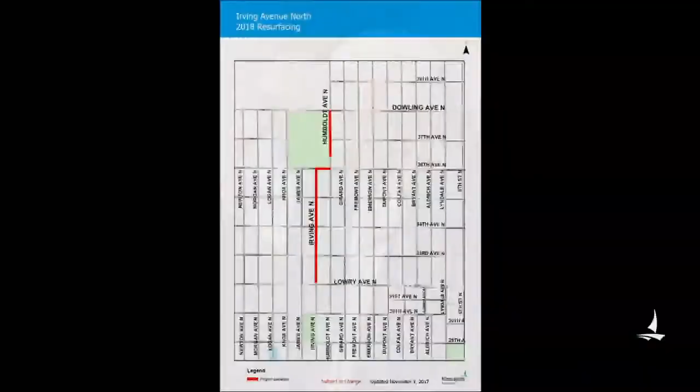The project itself is bounded on Irving Avenue North from Lowry to Dowling North, with many of the street sections built in 1978. The PCI rating for these project streets varies from 43, 44, and 50. Cost for the engineer's estimate is $8.3 million in 2018, and the approximate length of the project is 0.81 miles, a little short of a mile.

The project scope is a 2-inch mill and overlay with approximately 130 feet of existing curb replacement, with some CenterPoint Energy utility work. Public Works designated this project on February 9th of 2018, and we had a community outreach meeting on Monday, March 21st, with 135 invitations mailed and 2 attendees in attendance for that meeting.

Are there any questions per the presentation? Seeing none, I will open the public hearing. People can come forward and give testimony. Has anyone signed in? No one signed in. Does anyone wish to come forward on item 1? Seeing none, I'll close the public hearing and move the item as submitted.

Any further discussion? Seeing none, all in favor say aye. Aye. Dissenting nay. That carries. We can now go to item 2, which I believe will be with Mr. Matsumoto as well.

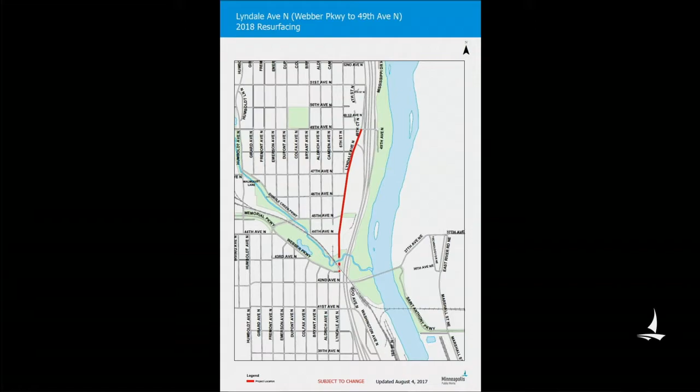Public Works is recommending the passage of a resolution ordering the work to proceed and adopting special assessments in the amount of $497,903.49, and the passage of a resolution requesting the Board of Estimation and Taxation to authorize the city's issuance and sale of assessment bonds in the amount of $497,905 for Lyndale Avenue North Street resurfacing project.

The project length is 0.81 miles, a little short of a mile, and the project scope is a 2-inch mill and overlay with approximately 600 feet of existing curb replacement. CenterPoint Energy does have some minor service work and work on a couple of valves. Other planned work for this project is 2 new 5-foot bike lanes and pedestrian safety improvements at the intersection of 45th and North Lyndale.

The project was designated on February 9th of 2018, and Public Works hosted a community meeting on Monday, March 19th, with 52 invitations mailed, no attendees in attendance. The project is scheduled for summer construction.

Thank you for the presentation. Any questions per that presentation from the committee? Seeing none, I will open the public hearing. I do have someone who signed in. I'll start with that person. Others may come up and sign in as well.

Starting with Mr. Bob Mayer, please come forward, state your name and address for the record. Hi, my name is Bob Mayer. I live at 4810 Fremont Avenue North and work at 4835 Lyndale Avenue North, which is right on this project. I have a question. My boss has a number of properties along Lyndale, and it seems that the assessment varies widely among those properties by frontage or square footage, and I'm wondering if perhaps the staff could speak to how that assessment is calculated. I would note that a business partner of my boss has a bar on 46th and Lyndale, and his assessment is roughly 1/4 by square footage or frontage compared to my boss's assessment. So maybe somebody could speak to that.

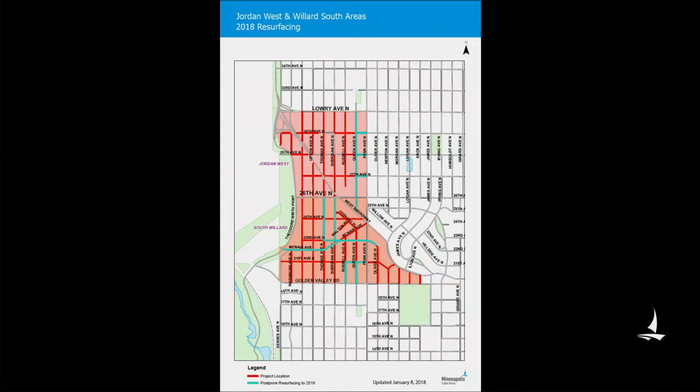The Willard and Jordan areas shown on the screen were built in 1977 for Willard and 1979 for Jordan, with PCIs of 54 and 62 respectively. The total accumulated miles for Willard is 5.66 miles and Jordan 4.61 miles for the combined assessments for both projects. The project scope is a 2-inch mill and overlay with approximately 2,000 feet of existing curb and gutter replacement.

Portions of this project will be delayed until 2019 to accommodate CenterPoint Energy and C-Line detour routes. The utility work in the area includes CenterPoint Energy replacing a number of their gas mains and services, upgrading the Beltline project, and other planned work, as part of the detour for the C-Line bus rapid transit.

The project was designated on February 9th, and on Monday, March 20th, 989 invitations were mailed with 18 attendees at the meeting at North Commons. This project is also recommended for continuance to the May 1st committee meeting so that residents along the blue streets shown, which are scheduled for 2019, can be noticed in a public hearing held on that date.

Thank you for the report. Any questions on the report? Seeing none, I will open the public hearing.

I am Richard Peel, and I live at 2365 Farrant Place. I'm sorry I missed that public meeting—there are so many pages in this thing that I didn't see it on the last page. But I look around my streets, and I drove down here today, and the only street I saw in better shape than our streets was the brand new Washington Avenue out here. Our streets are in very good shape. There's some cracks, but we just got done with a very harsh winter.

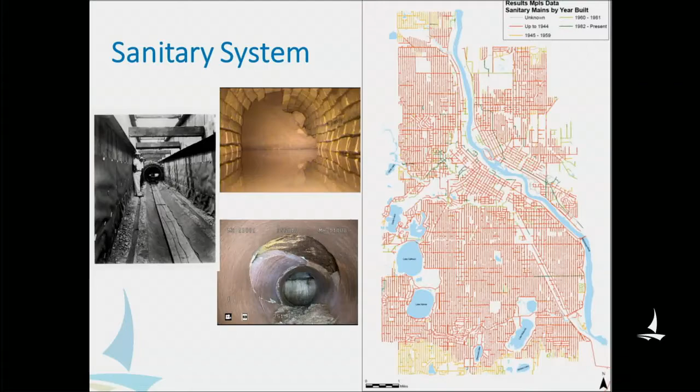As you may know, the sewers were originally built as combined sewers. This is not unique to Minneapolis. It's similar to cities that are commensurately old and around the same size as our city, meaning there was one set of pipes that collected both the sewage and the rainwater and went straight to the river. This was how it was between the first sewers of the late 1800s and the first storm sewers, which weren't built until development started around the lakes in the 1920s.

Around this time, not surprisingly, people began to worry about the health of the river. In 1926, the National Park Service did a fish survey between St. Paul and Hastings and found 2 fish — not 2 species of fish, but just 2 fish. At that time, the city of Minneapolis and the city of St. Paul came together and decided it was time to build a wastewater treatment plant. That was the Pig's Eye plant, which today is called the Metro Wastewater Treatment Plant in St. Paul.

When that came online in 1938, all of the sewers, which were still combined, went to the wastewater treatment plant, which worked fine unless it was raining. Then the sewers were over capacity and overflowed untreated to the Mississippi River. This was the case through the 60s when we started to build separate storm sewers comprehensively as part of a citywide paving program and accelerated the separation of both storm and sanitary. In the early 80s, the federal government began to pay more attention to this around the country.

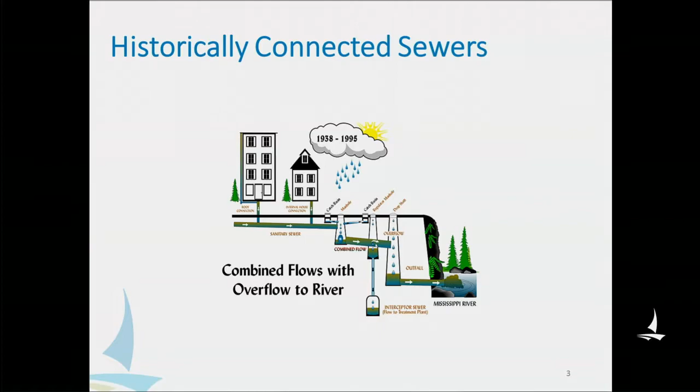With the help of the federal government, the city, in a data-driven way, started to work on separating the storm sewers from the sanitary sewers. Since then, we have focused on looking at ways that we can get direct connections of storm out of the sanitary sewers. And because of that intentional investment that Director Hutchinson noted, we have essentially separated the sewers.

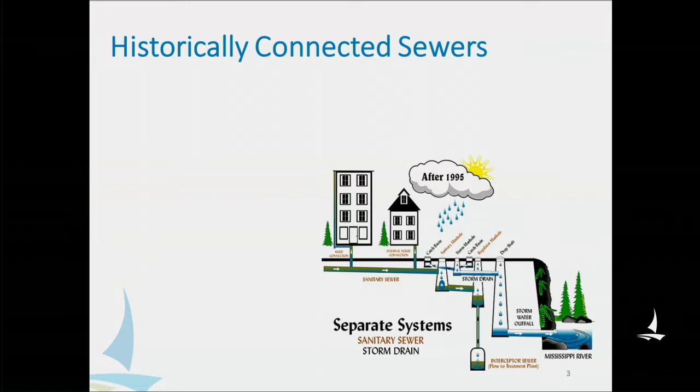So this is a success story, and I think it's worth noting that Minneapolis and St. Paul are the only cities that I'm aware of in the entire country that have been able to do this without a consent decree from the EPA. Most other cities, Midwest and on both coasts, are still under the thumb of the EPA, who are telling them year by year how much they need to invest and what they need to do. The city has been able to do this proactively without that.

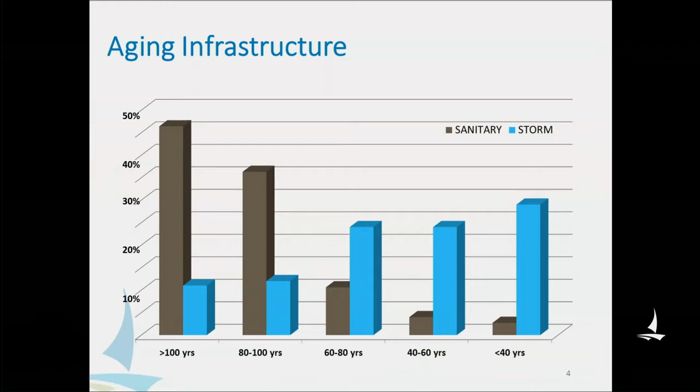The storm system is also majority more than 50 years old. It's the age of the infrastructure, our need to protect human health and the environment, and our desire to be good stewards of public dollars that have driven us to take a data-driven assessment approach. We're looking at condition, using modeling tools, and working with our regulatory partners to make sure we have the tools to move ahead in the best way.

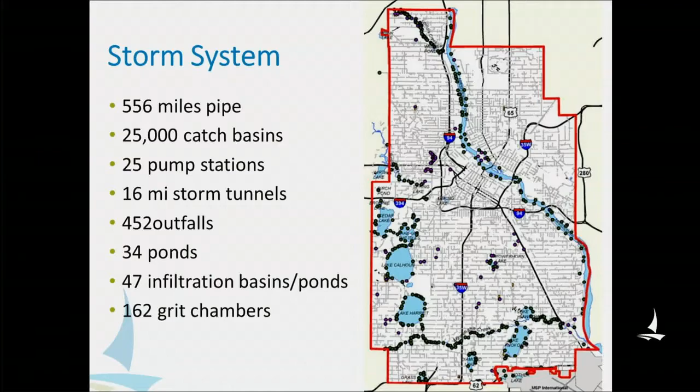One of the critical components of our storm system are our storm tunnels. We have 16 miles of deep storm tunnels underlying the most densely developed part of the city. Together with MnDOT tunnels, they drain almost a third of the city, shaded in green here.

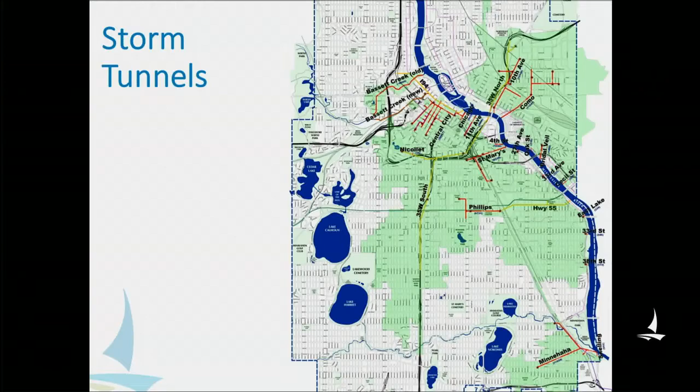The tunnels, like the rest of our sewer infrastructure, are very old and were built at a time with less impervious surface, so they were designed to accept runoff from a different landscape. As a result, we have a pressurized system such that when it rains, not only are the tunnels full, but the manholes 100 feet up are full of water, putting pressure on those tunnels.

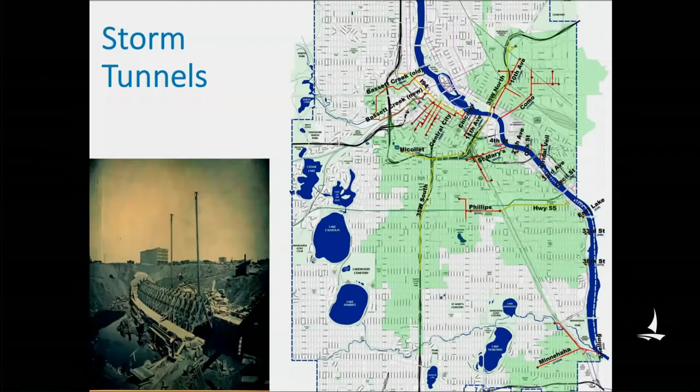This picture shows the original construction of the Bassett Creek Tunnel, the old Bassett Creek Tunnel, which is today underneath the North Loop. You can see the construction techniques were different than we would do today, and the landscape looked very different than it does today.

Much of our work on the tunnel system today is not only understanding condition, but looking at integrity, trying to find ways to decrease pressurization, fill voids, and reinforce the liner.

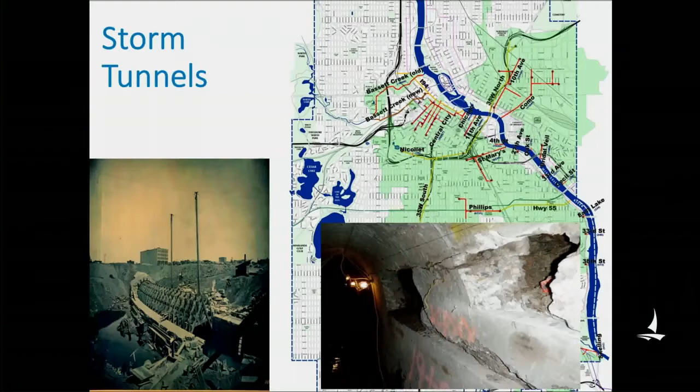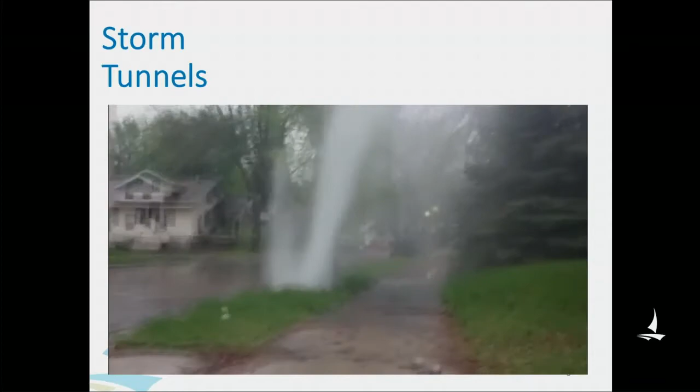This video is taken near the Como Avenue Tunnel near the University of Minnesota. We've since fixed this location by putting in a surge chamber, but it highlights the fact that it represents not only underground risks, but above ground risks as well.

So we've talked a little bit about aging infrastructure and the tools we're using - data-driven, televising data - to look at risks and prioritize where we'll look for capital and operation and maintenance investments.

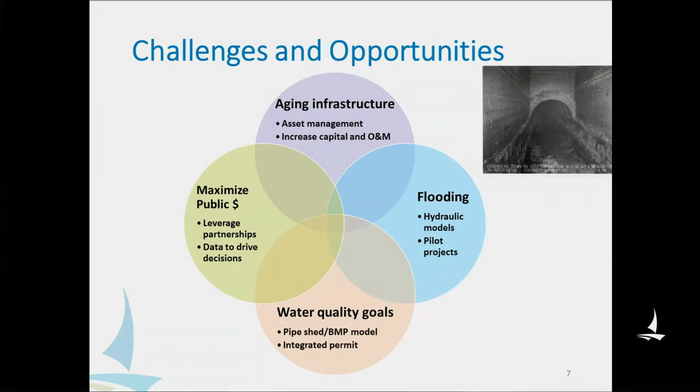On the storm side, we're also looking at flooding, and many of you know this because you receive the same types of emails I do every time it rains. Historically, the city was more responsive to flooding complaints, but we've since moved away from that and are doing a comprehensive stormwater model of the city, which will be complete shortly. We're using that model to help prioritize where we should mitigate flooding.

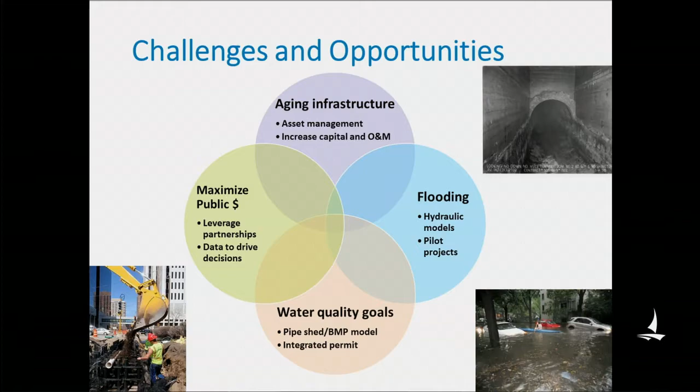I'll talk about several pilot projects we have underway. As part of that, we're looking at where we need to do more for water quality - where we need to fix infrastructure, address flooding, and put in water quality treatment to protect our lakes, creeks, and river.

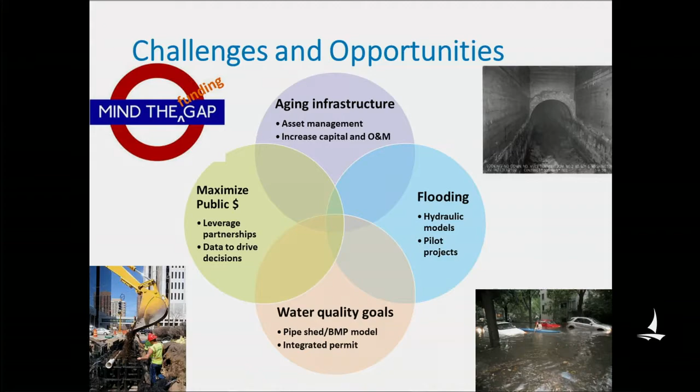And finally, how we can maximize opportunities with our partners - not only our internal partners when street reconstruction comes up, but our external partners like our watershed partners, the county, and the Met Council.

The National Pollutant Discharge Elimination System is the permitting program that we and other cities operate under to regulate both wastewater and stormwater. Historically, the city had two permits. We had a combined sewer overflow permit, or CSO permit, with the Met Council, originally issued in 1984 and reissued in 1997. It has been expired since 2001.

We also have a municipal separate storm sewer system, or MS4 permit, which regulates stormwater. That permit was reissued in February of this year with a novel approach called an integrated permit, which now recognizes the historical connected nature of our infrastructure.

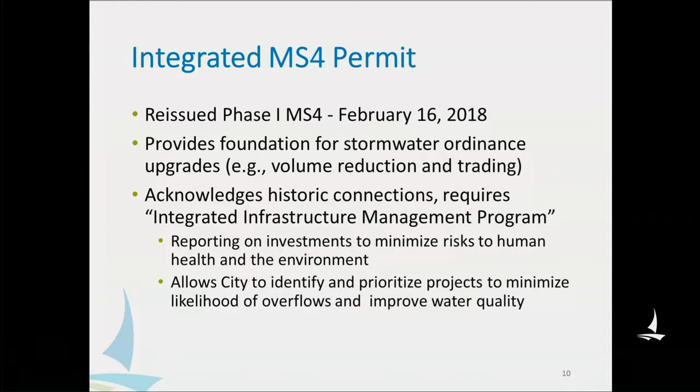So we've been taking an integrated data-driven approach, and some of these projects that I'm going to highlight will be familiar to you, but I want to recognize some of the ways that we are integrating this going forward. The modeling work that we've done on the storm side has allowed us to not only address things like the flooding work, but it also lets us layer that on top of the condition of the pipes and the water quality.

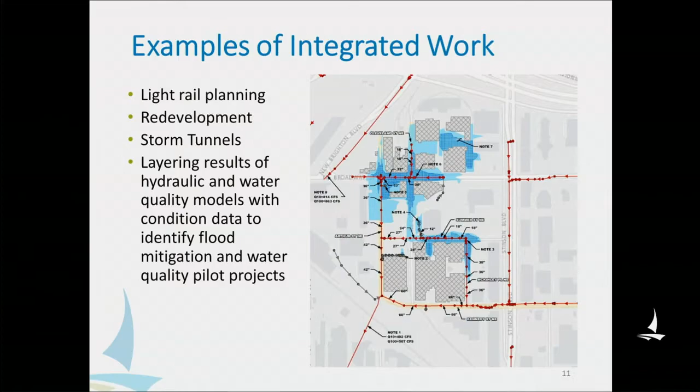So this is an example of the types of projects we're going to be doing using the tools going forward. Others include the redevelopment of Nicollet Mall and our ongoing light rail planning. We have a large project coming up for the Central City Tunnel.

This is the last large project that was identified after a 2011 report that comprehensively looked at the work we needed to do on the storm tunnels. The Central City Tunnel underlays the entirety of downtown and protects not only the city, but regional and statewide assets. And it is undersized and under pressure.

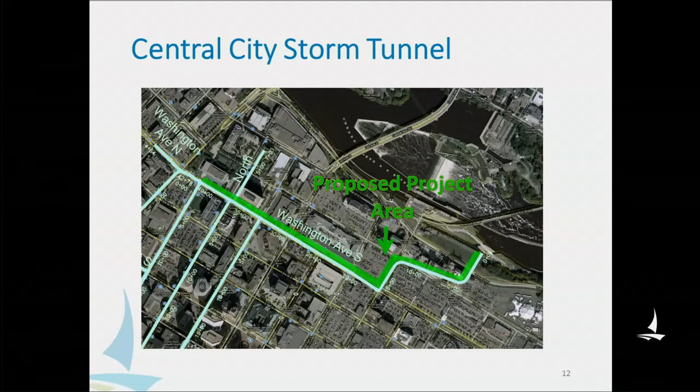The segment identified here recently went through a feasibility study, and we're going to begin design and ultimately do reconstruction on that segment, which will be done not by open trench. We're not digging up Washington Avenue, but we will be going underground from the river and expanding the size and capacity. This work is made possible by the modeling so that we understand what is necessary to make our system resilient for the next 100 years.

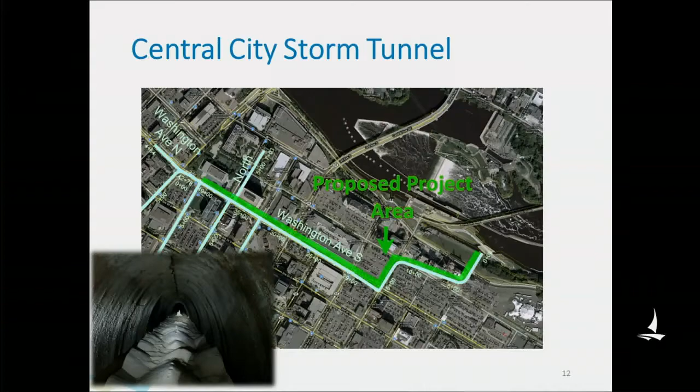You saw on the graph that we have not had overflows for the last 10 years. The only time we had an overflow was the result of a failed storm tunnel, and this was in downtown in the Central City. Because the system was over pressure, the water found a crack, shot out through the sandstone and penetrated the Met Council's wastewater interceptor nearby and resulted in an overflow to the river. As that water receded, we ended up with 1.5 feet of sand in the tunnel, which we had to emergency expedite a repair of.

And the Central City project will alleviate this risk going forward. This is one of the city's bonding requests for the state legislature this year.

In addition, we're working on water quality and flood work. You can see on the top pictures taken recently and in the past of flooding across the city. You've heard how we're taking the modeling to understand how to prioritize and work through these.

In the past, flood mitigation projects have included infiltration basins. On the bottom left is the Holland Basin near Edison High School. The bottom middle is a wet pond, at Columbus and 37th in South Minneapolis.

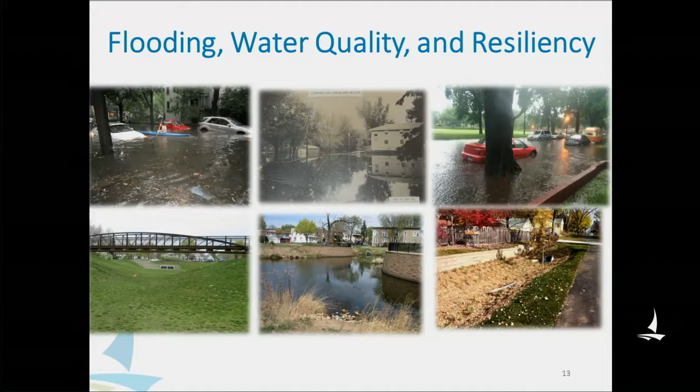And the bottom right is the North Avenue Greenway, 37th Avenue North, which includes not only underground storage and water quality treatment, but a bikeway amenity for that community. So we're looking not only at the condition, but ways we can mitigate flooding and water quality going forward.

Right now, we're working on 5 flood mitigation projects. These are pilot projects in partnership with the Mississippi Watershed Management Organization, the Minnehaha Creek Watershed, and the Park Board in areas around the city. These projects will help us understand how to prioritize flood work going forward, so we can effectively and efficiently get projects in the ground and utilize public dollars well.

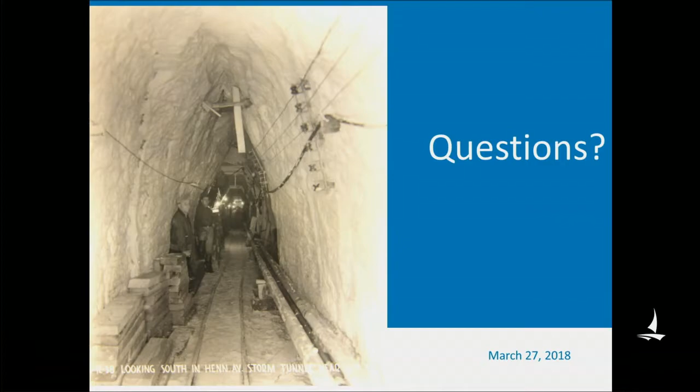So we've come a long way since the time when we were having regular wastewater treatment overflows. I want to say thank you again to the leaders at the city and the staff in Public Works who were committed to this over time. I think we now have a regulatory structure that recognizes the work that needs to happen going forward, but also recognizes that we have a lot of other drivers, and we have the data in our pocket to help us prioritize and make those decisions in the best way for the city.

So if anyone has any questions. Any questions for the presentation? Councilmember Fletcher.

Thanks for this presentation and congratulations on getting to this milestone. It's exciting. I guess I was wondering, you mentioned the increase of impermeable surfaces, and I'm wondering, as we think about adding capacity with the Central City Tunnel, how much should we also be thinking about permeable surfaces and how much impermeable surface we're adding, and how we manage that so we're reducing the runoff required of the tunnels?

Yeah, that's an excellent question, Councilmember Fletcher. So our existing stormwater ordinance does require us to reduce rate and impervious surface as redevelopment happens, and we are implementing that, and we will be putting together a new generation of stormwater ordinance that will further that work. The work downtown at this point is just trying to catch up from the last 70 years. We will do that, and we will continue project by project, area by area, to work to reduce impervious surface so that we don't end up in this situation again.